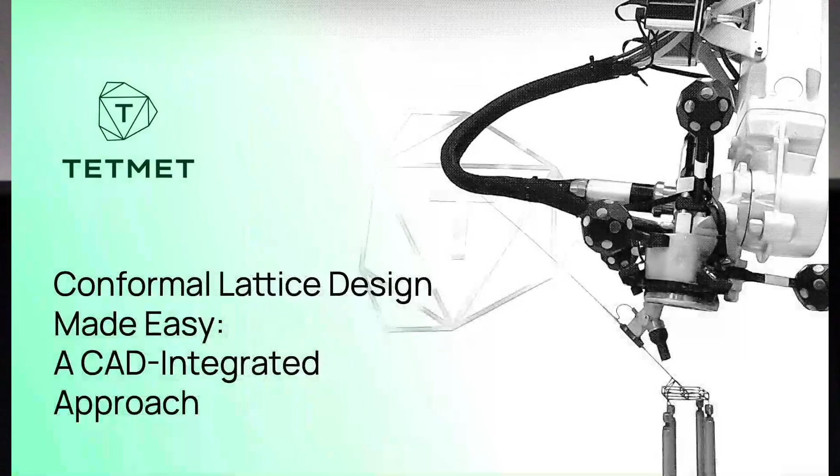Waiting. It's working here. Yeah. So I'm sorry, it's going to be maybe with a bit less humor, but I'm British, so I don't know if you really want British humor. So.

Okay. So good afternoon, everyone. So I'm Rachel Azulay. I work at Tetmet. I'm head of applications engineering. And basically what we do is we have developed a manufacturing tool for creating lattice structures. We're a 2.5-year-old startup from Paris. And I'm going to be talking about a tool that we developed for our process called ASLM. And so there's going to be a bit about the manufacturing and then the actual tool.

So we're lucky enough to live next to one of the most famous lattice structures in the world, the Eiffel Tower. It was actually in the first presentation of this conference, so it's quite funny. And I think it's a perfect example of civil engineering and what they have done best, which is distribute load efficiently, minimizing material, maximizing strength, things that we have really looked into also in terms of architectured materials. So basically what we do at Tetmet is the same thing, but at a smaller scale.

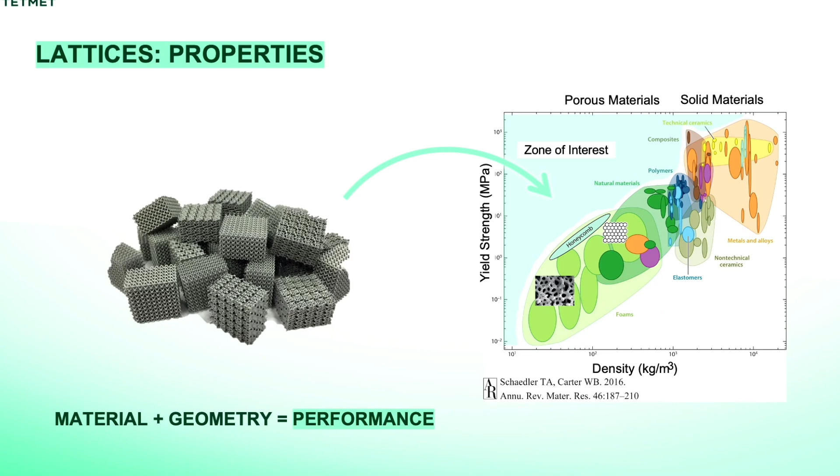So if we look at architectured materials, because I have a background in theoretical mechanics, we know that performance isn't just about the material we choose, it's also to do with the geometry of the material and how we arrange it. If we have a look at what's happening over there, we have an Ashby chart of material properties like yield strength versus density, and there's a huge zone of interest on the top left, where we know we can push some boundaries with lattice structures. And so by carefully choosing some of the properties, we can tap into this potential. We can choose stiffness, weight, crack propagation paths, you name it. And the aim is to unlock performance that comes from structure as much as it comes from the material.

So how do we do this? This is basically the photo of the conference. We can tune density by changing local lattice density, either by varying strut radius or by densifying. We had a lot of shoe presentations. This is a slide that we usually use, but I'm glad to see that it is useful in the shoe industry. You can choose your unit cell, so different unit cells are going to have different properties. And then you can do some really funky things. You can do some thermal tuning. You can do some more instability related properties. And so that's really tweaking up to the very edge of what you can do with lattice structures.

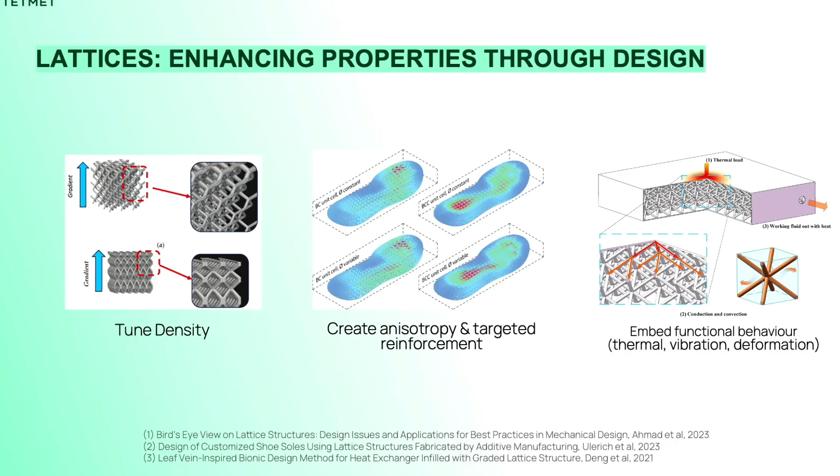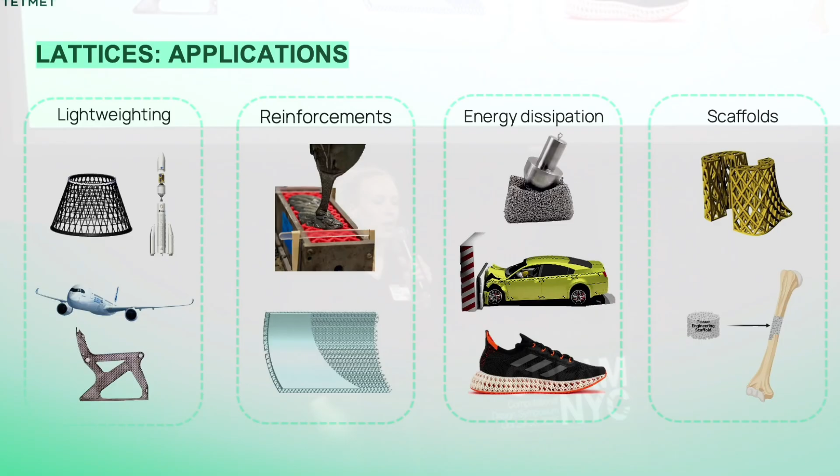What are the applications of all of this? Having done a PhD in this and coming from academia, the question is always, why are we doing this? What's it for? So there's use in lightweighting, obviously, because we create less dense structures. So any transport industry, basically. It's also used in reinforcements, either as a matrix, and then you can add material around it, or as reinforcements of plates. And energy dissipation. So this is the link between the shoe and the car. You can tune how much energy you can dissipate with your lattice. And then you can do some really nice things in the bio industry, where you can create scaffolds and have cells that regenerate inside.

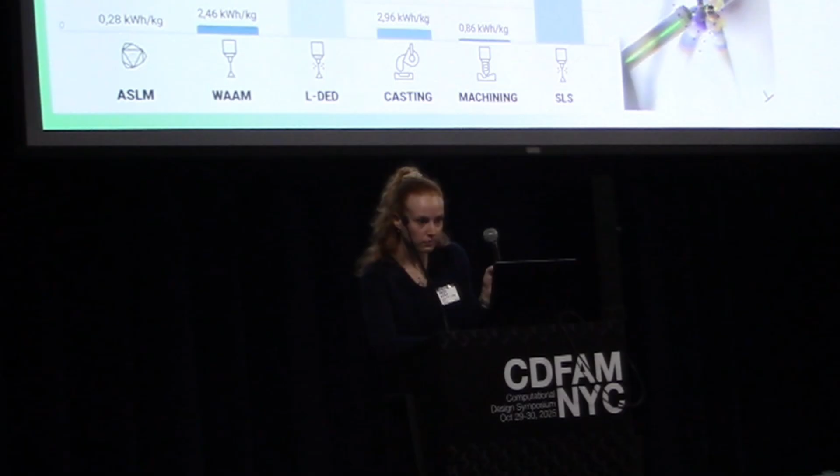So let's talk a bit about manufacturing. So obviously 3D printing, but I'm not going to talk about this. I'm going to talk about what we developed at Tetmet. We have developed this robotic arm that's tweaked to create these complex lattice structures. Our base material is just regular rods. We have a laser, so we're able to weld the rods. And we also have some machine vision in there so that we can see if the welds are correctly done. This is what is seen by one of the cameras around the head of the robot, and then we can really tell what's going on.

The main advantages are what? Basically it's extremely cheap off-the-shelf equipment, so no really big tooling as you would have for stamping, simple source material, and also extremely low energy use compared to traditional 3D printing. The reason for this is we only spot weld a very short and very low part of the rods. So indeed, we're not melting the whole thing. So it is very competitive in terms of carbon usage.

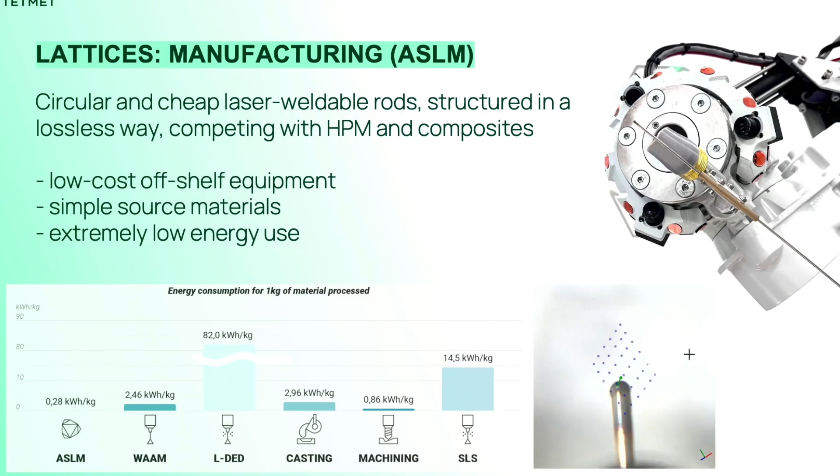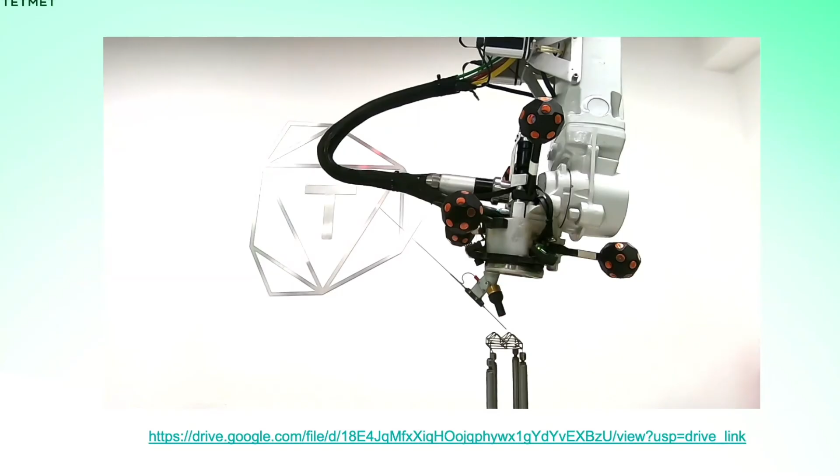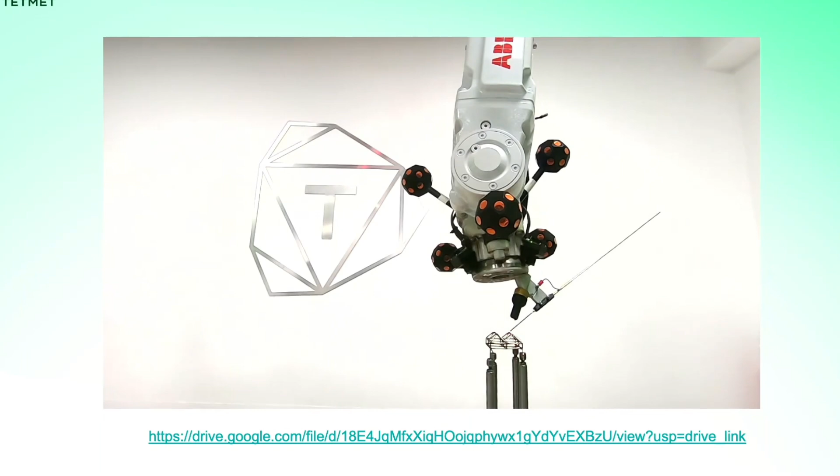So how it works, I think I have the same problem with my mouse. Okay, so this is the robot in action. Sorry, this is not the robot in action. There it is. So you can see it welding, cutting, positioning, welding, cutting, positioning, filling gaps, and then making this structure. This is relatively slow for the moment. We're in a lab environment, it's getting faster. This video is kind of old as well. But we're getting there, and we're already faster than 3D printing.

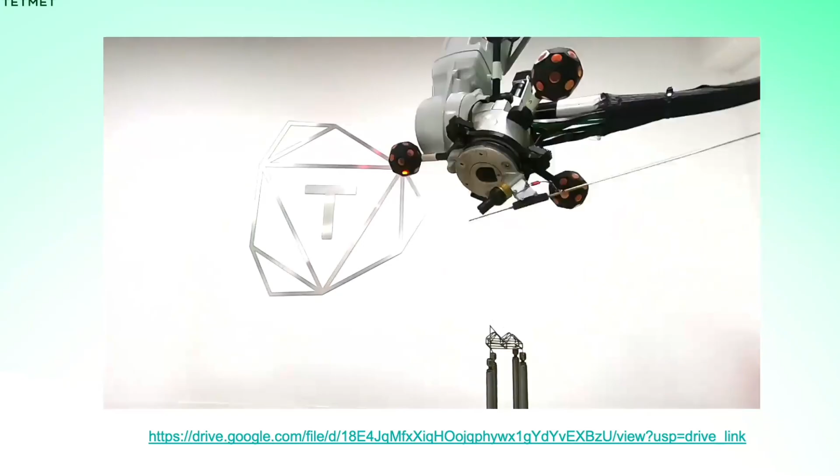So a few examples that I have here as well. So this is what we're able to build. Basically, we can build any size. In terms of the size of the actual struts that compose the part, they are relatively big compared to 3D printing, but we still can have some really nice properties.

So for instance, I can stand on this if I don't lose my balance, and it's perfectly strong. If you want to stand on it, I'll be over there at the end, and you can try.

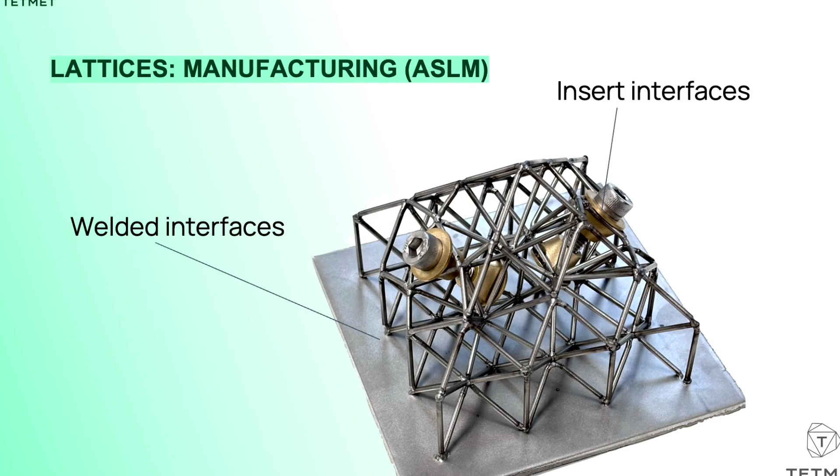Another question we generally have is how do we interface with other parts of the assemblies, so we can weld on plates and we can have inserts. So the next question is, and it kind of circles back to the title of this talk, is how can we efficiently design lattices for our process called ASLM.

And basically, we've developed a second part of the company, at least the tool. So it's called LDS. It's design plugins for CAD software. So we didn't want to build our own CAD software. We wanted to be in the environment of CAD instead of building something new.

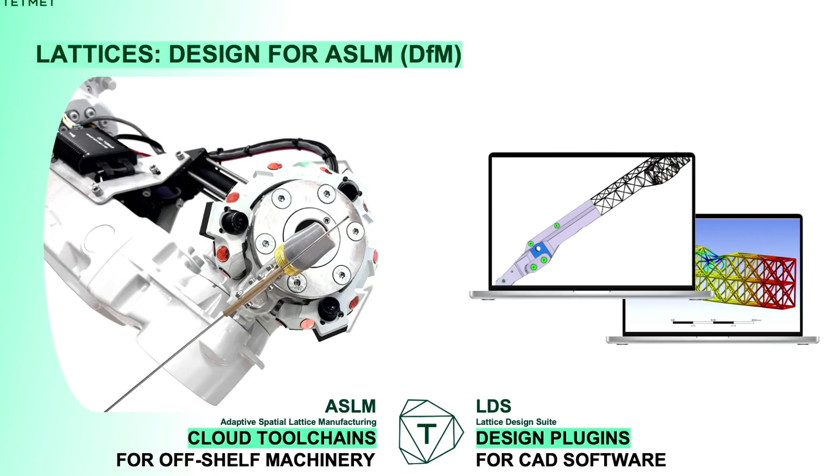So when we started thinking about lattice design solution for ASLM, we identified a few key requirements. Obviously, we did our homework and we looked at stuff that you've seen today, but we always had to do that extra step because we needed to be manufacturable and we need to have the right information that's sent to the robot. And so basically, we wanted something mechanically sound. What I mean is conformal. We can't have sticking out rods. Mechanically, it doesn't really make sense.

Then the tool should be really easy to use for a CAD engineer, because we work for industries, so they have their standards, and it's not like what you would do for 3D printing. Third, we wanted it to be CAD-integrated, because we didn't want to build a new tool, and we also wanted it to be ASLM informed. So basically what this means is all of the constraints of the robots are in there.

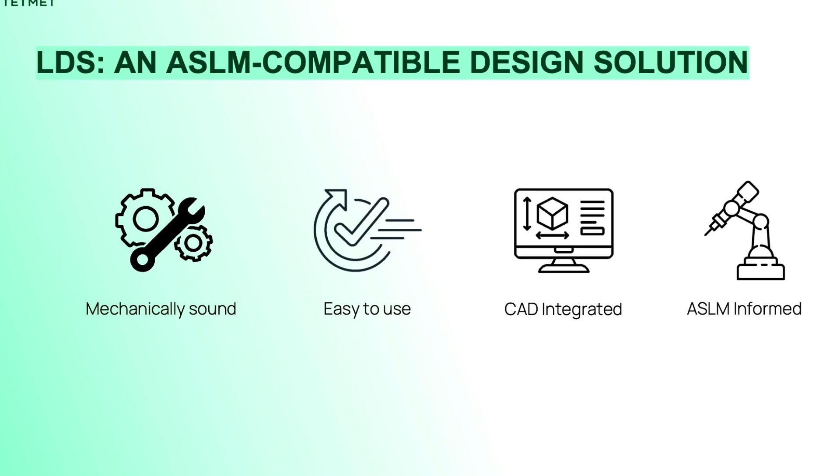We basically had a look at the current projects that we had, and we figured that most of the design requirements that we had came from traditional CAD designs. So what this means is we have artifacts from legacy ways of producing things, machining, turning, whatever. And so this kind of shaped how we designed LDS.

We obviously wanted a fast and efficient CAD native solution so that people wouldn't be confused as to how it works in the workflow. And we wanted to keep the workflow very, very easy and reduce design friction.

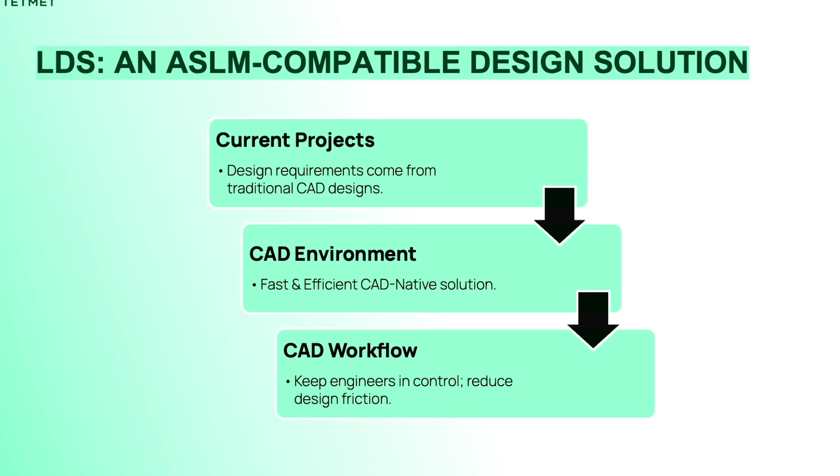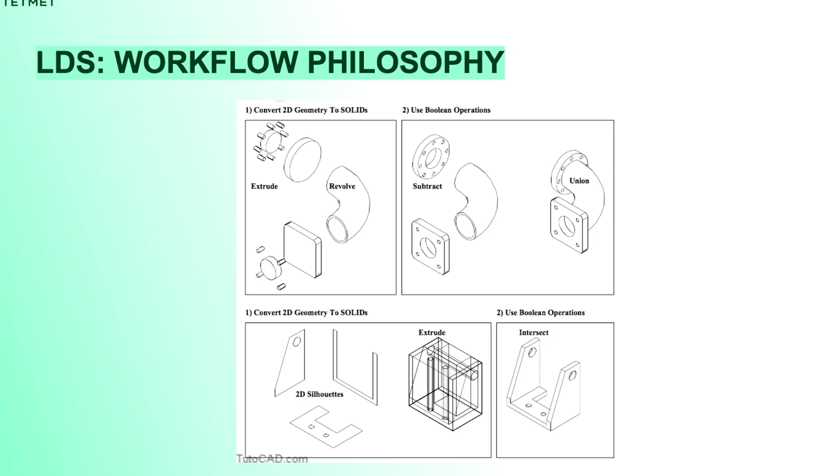So if we look at a traditional workflow, I'm not teaching this to you guys, but it's basically very simple operations: extrude, revolve, subtract, Boolean operations, nothing too fancy. And so this process is extremely familiar to CAD engineers and people who work in traditional industries. So for our tool to be adopted, we really went down that path so that it would be accessible for engineers.

And basically what we do is we do an intermediate step. So instead of going from a sketch and doing traditional extrude and revolve, we mesh our sketch and then we extrude and revolve. So this step creates conformal lattices extremely efficiently because we inform in the design process, like where are the edges, where does it start, where does it stop, and it's very native and intuitive for a CAD engineer.

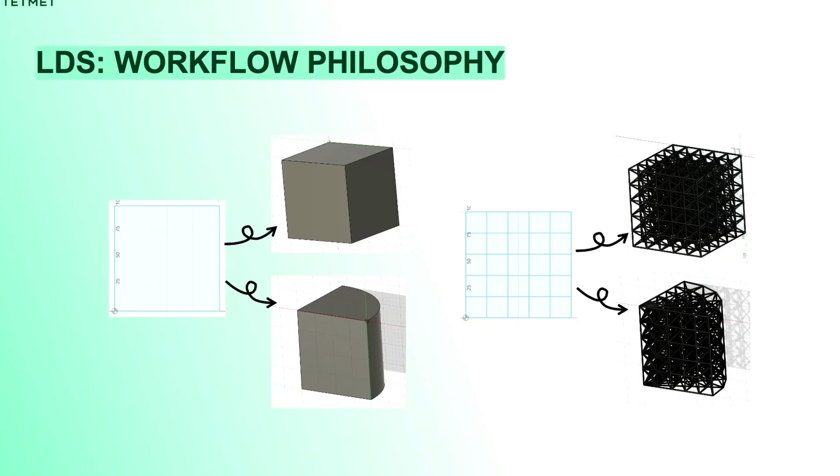So just a quick overview of what the features specific to creating lattice sketches do. So what you're able to do is you're able to create a selection of curves inside a geometry so that it's easier, and we have some algorithms to do some automatic cell generation.

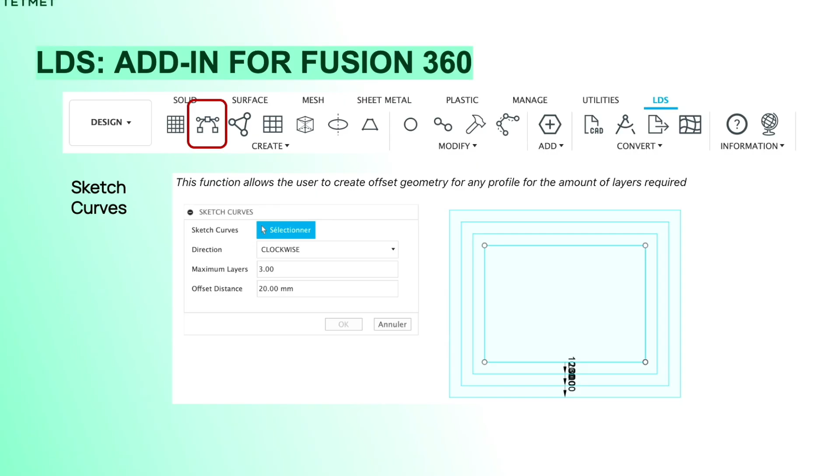We also have these node generation things. So basically what you can do is you can tell what the minimum rod length you want, maximum, how many divisions and things like that. So it's parametric in a sense, but you do have to inform during the design what you want.

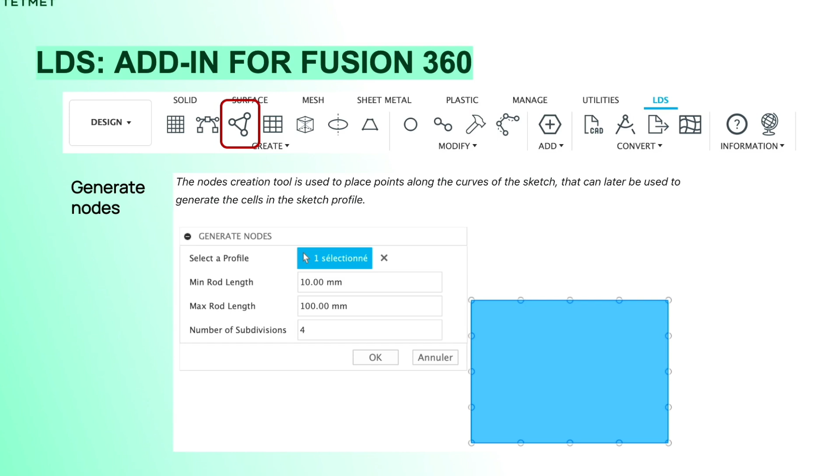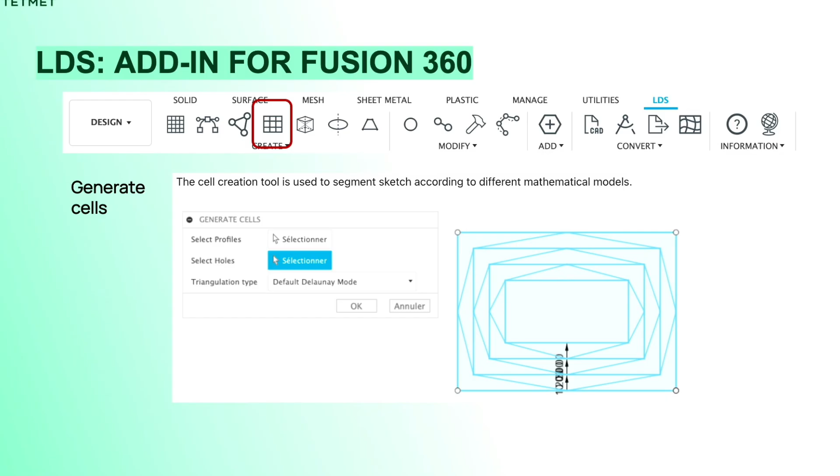You have some automatic generation of cells. So this is Delaunay, for instance. We have some others. If you want to do it by hand, you can, because that's the beauty of it. It's in Fusion, so it's native. So if you want to remove, I don't know, whatever line, you can remove it and add another one.

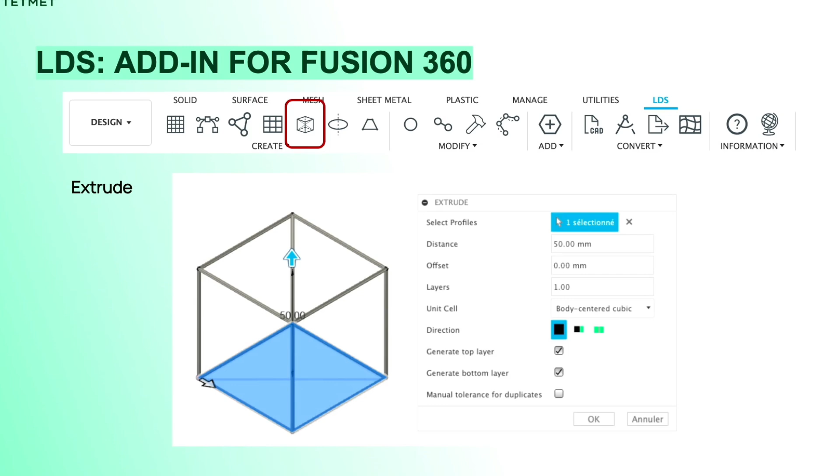And then we have these extrude functions where you can choose the distance, the offsets. It's basically exactly the same thing, but you get to choose a unit cell. And the same for revolve. So when you do curves, you have to be really careful because you have to approximate these with segments, but you don't want them to be too close. So you have to really think about how you're going to approximate your geometry. So this is one example where you can have a 6-step revolve or a 12-step revolve, but this is a revolution.

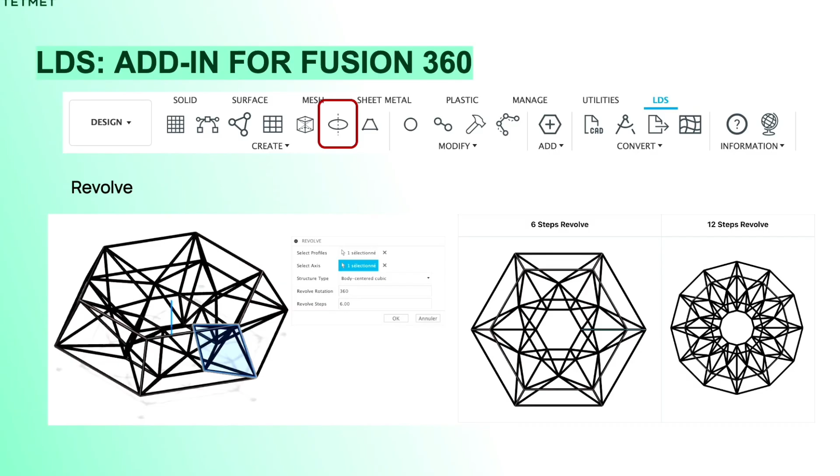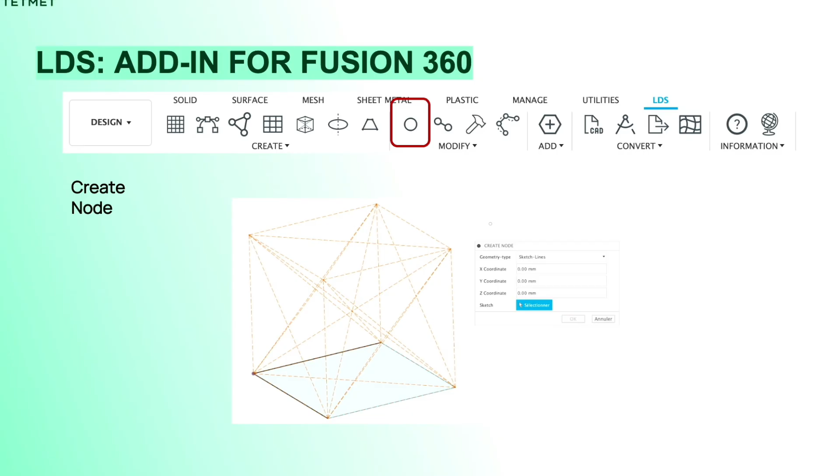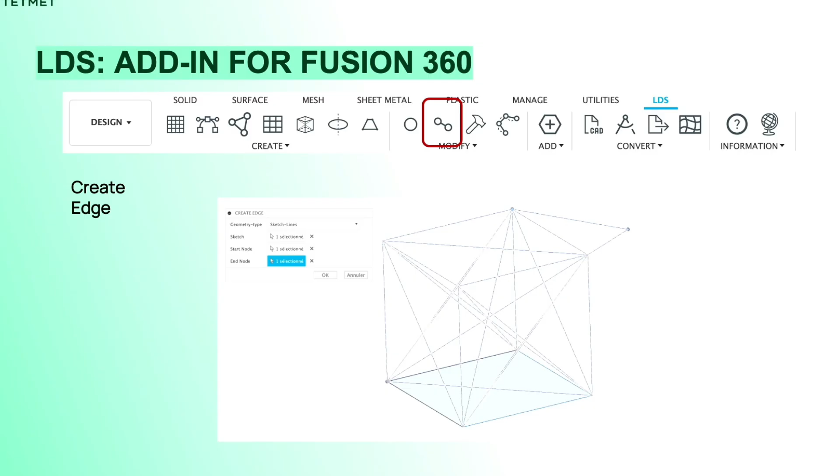There's also a loft option, and then you can do some really nice things. For instance, when you do a design, sometimes you have some things that you really want to tweak by hand, and this is possible by all of these features. So you can create some nodes. You can move them around like a sketch if it's not constrained. And then you can fix your geometry and merge different extrudes or revolves that you've done.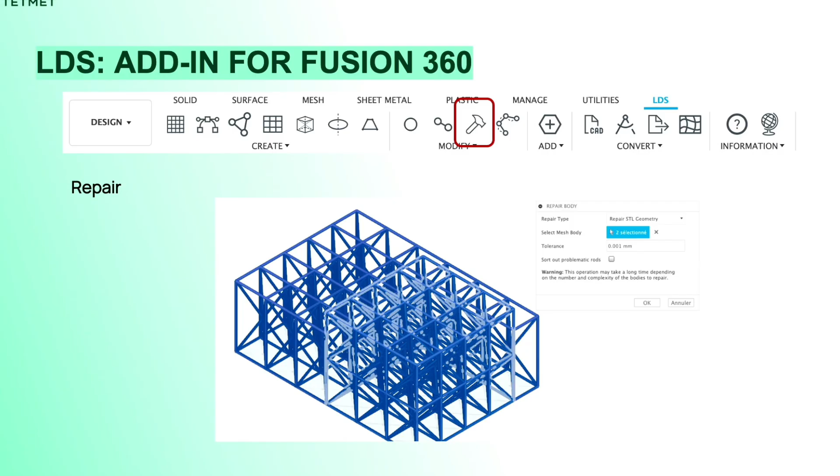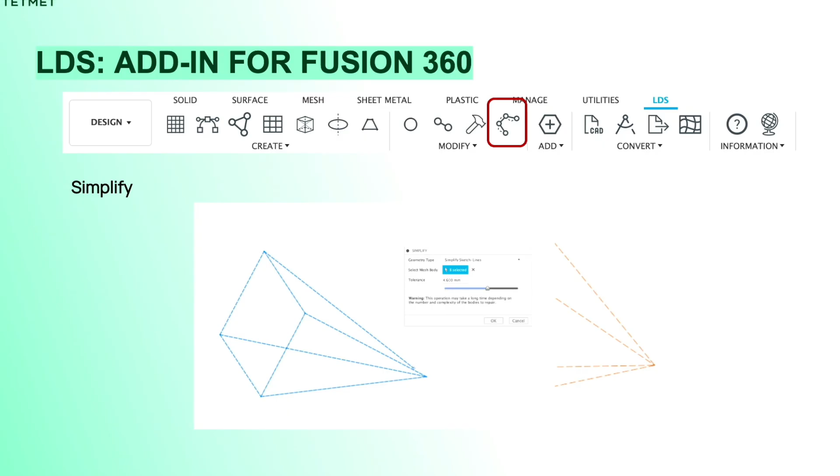So this is the difficult step. The people from Carbon were saying that it's extremely difficult to connect them to a surface, and it's true. It's extremely difficult. But we do have a way of doing it. And then we can also fix some geometries, like for instance, if for some reason a node is too far off, we can connect it to its neighbors.

And so, yeah, this is about everything I have to say about Fusion 360 and what we've done. The only thing I want to add is we have a really nice LCA tool. So when you design, you know. And it's also a feature that's really widely used in the aerospace industry and automotive industry.

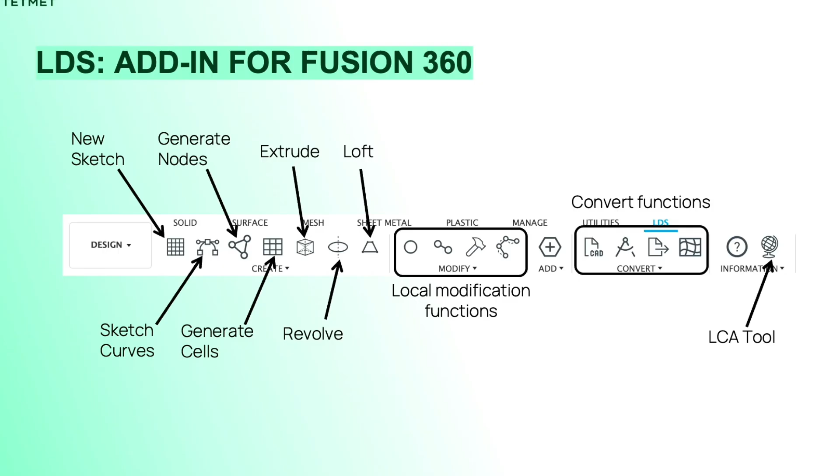Basically, you have the sketch, and we had to separate the sketch into different parts because they're not all the same thickness. And for it to be lightweight, because a lot of people do implicit geometries so that it's lightweight and it's easier to do. We can't really do this in Fusion, but we do have some workarounds. So we work with STLs, and then we can convert it, and then we can add some features.

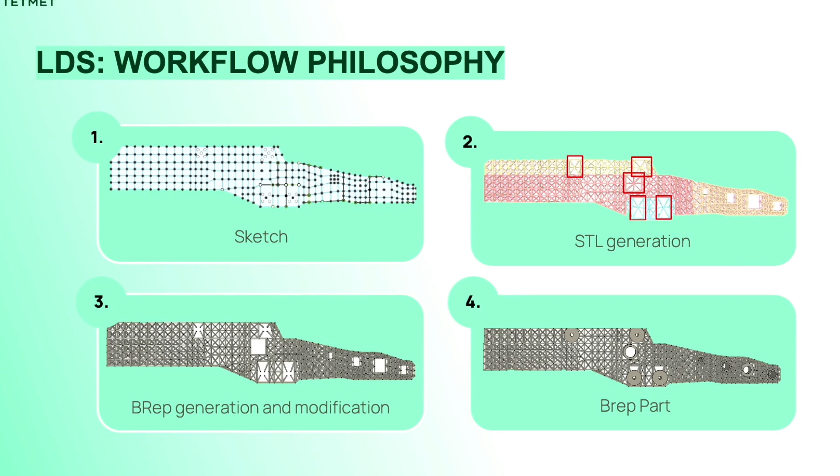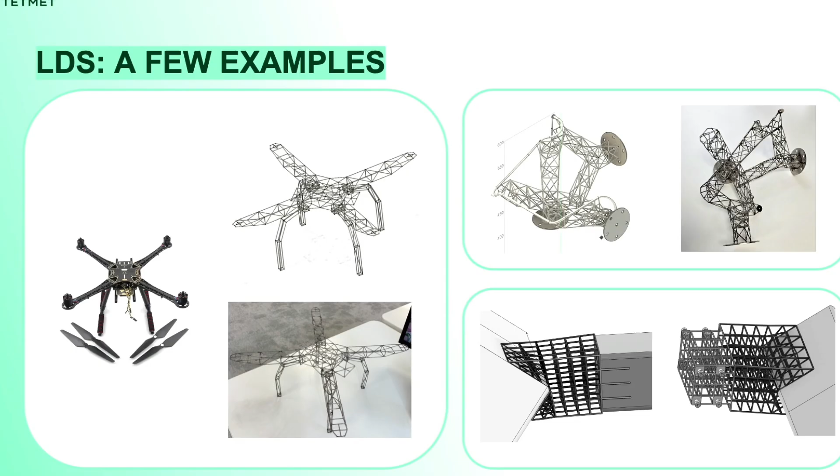And this is a connector, but what's really nice is because it's CAD integrated, you can already add some features that exist, or you can extend, and then you can machine stuff and use the traditional mechanical engineering workflow.

So as a conclusion, LDS is CAD native, and it's a really pragmatic way of designing lattice parts. Nothing too funky for the moment, but we needed something that was robust and useful for us, so this is why we made it. And the next steps would be maybe going for some kind of optimization, but lattice optimization problems are really difficult. It's a whole field in academia. There are a lot of optimization functions that you can use. So maybe if it's user-informed, it's a bit easier to solve.

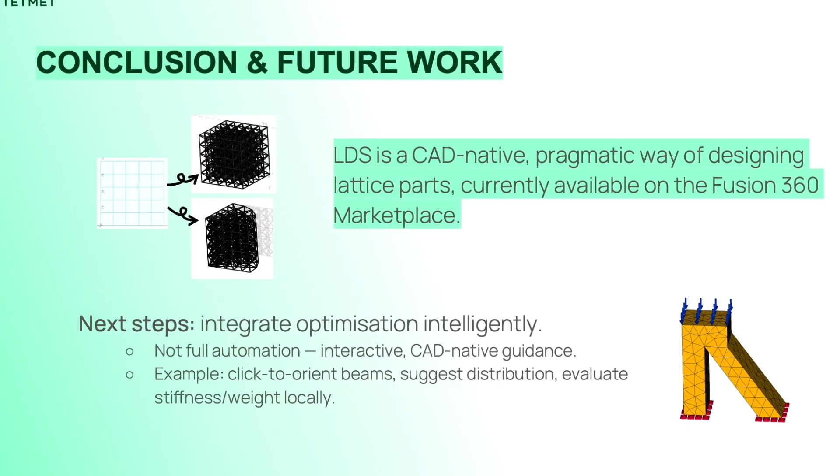And so that's why we haven't really gone the way of, like, we push a button, we generate a lattice. We want it to be user-informed and have the hard questions answered by someone who actually knows what they're doing.